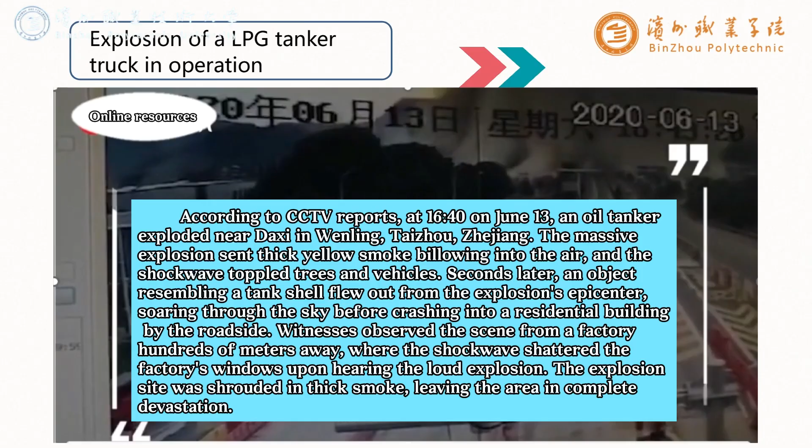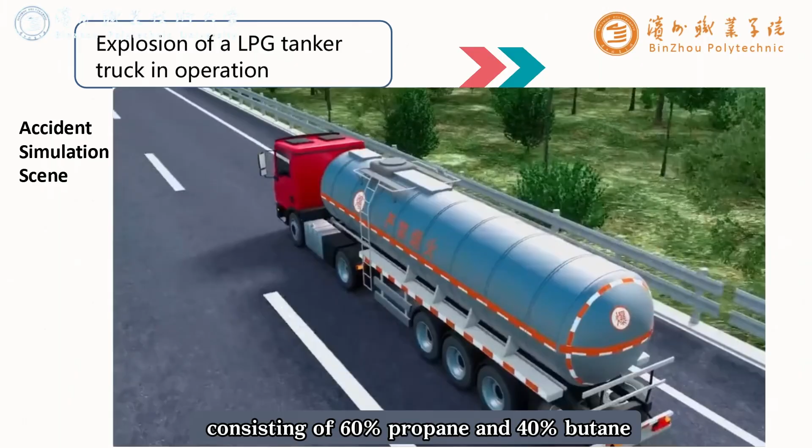This is a simulation of the accident. At around 16:40 on the 13th of June, 2020, a Dongfeng brand semi-trailer tanker, loaded with approximately 25 tons of liquefied petroleum gas, LPG consisting of 60% propane and 40% butane, and with a filling pressure of 1200 kPa, approximately 12 atmospheres, was traveling on a section of the Shenhai Expressway near Wenling, Taizhou City, Zhejiang Province.

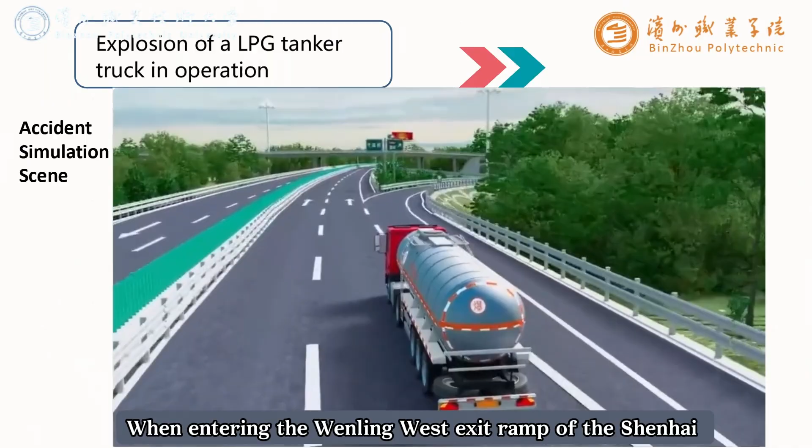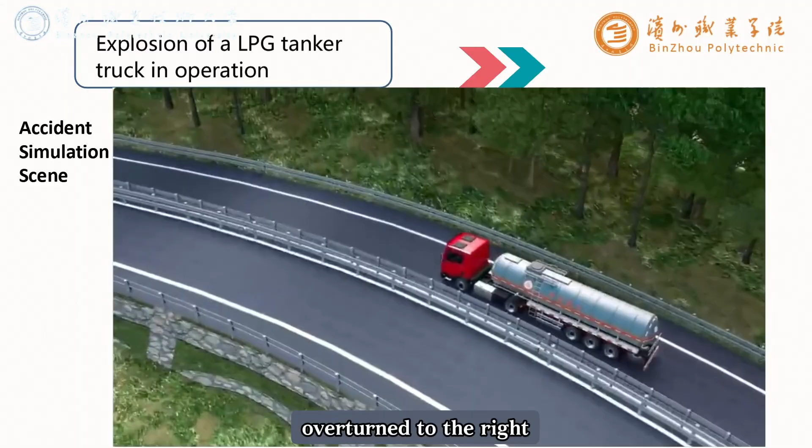When entering the Wenling West exit ramp of the Shenhai Expressway heading towards Wenzhou, the vehicle did not slow down according to the road speed limit of 30 km per h. It entered the ramp at an actual speed of 52 to 54 km per h, overturned to the right, scraped against the rotating guardrail of the ramp, and slid forward.

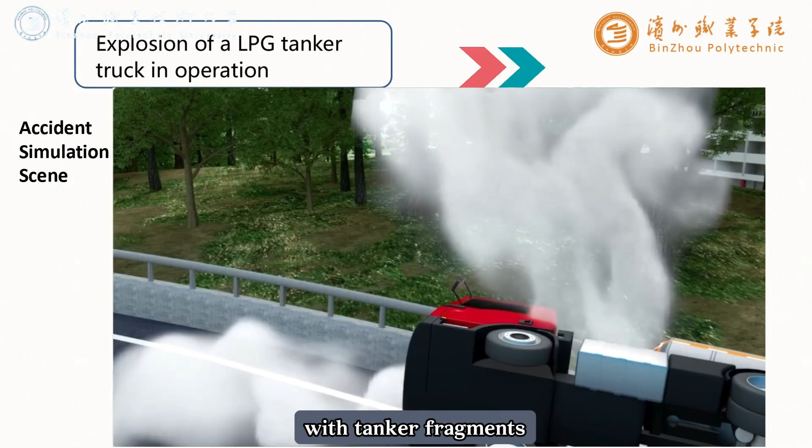The tanker collided with the concrete guardrail end of the overpass bridge on the ramp, causing the tanker to rupture and disintegrate. The tractor and semi-trailer separated, with tanker fragments and the semi-trailer flying out in different directions. The LPG in the tanker quickly leaked, vaporized, diffused, and spread.

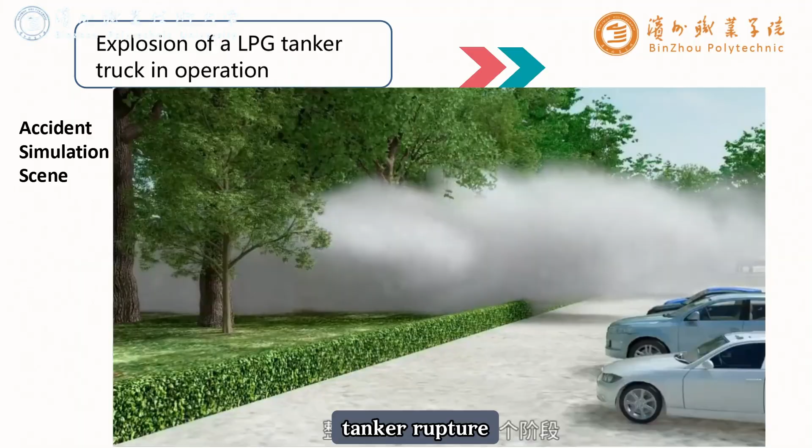The entire accident process was divided into 4 stages: tanker rupture, LPG leakage and diffusion, initial deflagration, and secondary vapor cloud explosion. The accident investigation concluded that the explosion of this liquefied petroleum gas (LPG) tanker truck, carrying approximately 25 tons of cargo, caused massive damage.

Ultimately, the accident resulted in 20 deaths, 175 hospitalizations, and direct economic losses of 94.77815 million yuan. This was the most severe in-service LPG tanker truck explosion in nearly 20 years. This incident was a major industrial safety accident caused by a LPG tanker truck traveling at excessive speed on a highway ramp, resulting in a rollover, collision, and leakage, which subsequently triggered an explosion.

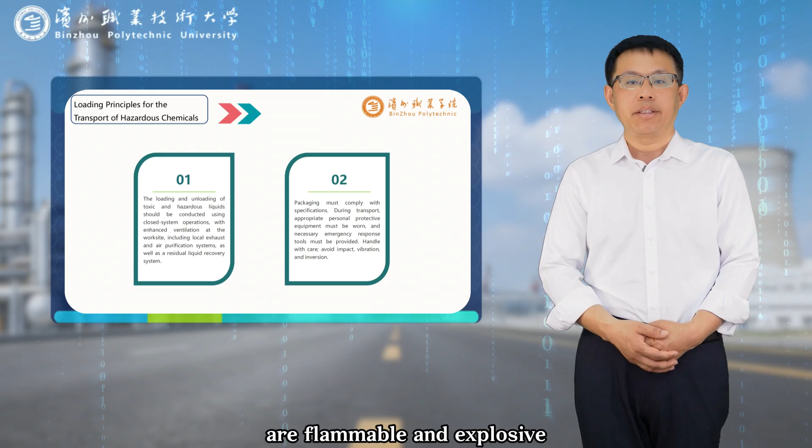China is a major producer and user of hazardous chemicals, which are typically transported by rail, water, and road using trains, ships, and trucks. Since most of the transported substances are flammable and explosive, and transportation is often affected by factors such as climate, terrain, and the environment, safety requirements for such transport are generally high. So, what precautions should be taken when transporting hazardous chemicals?

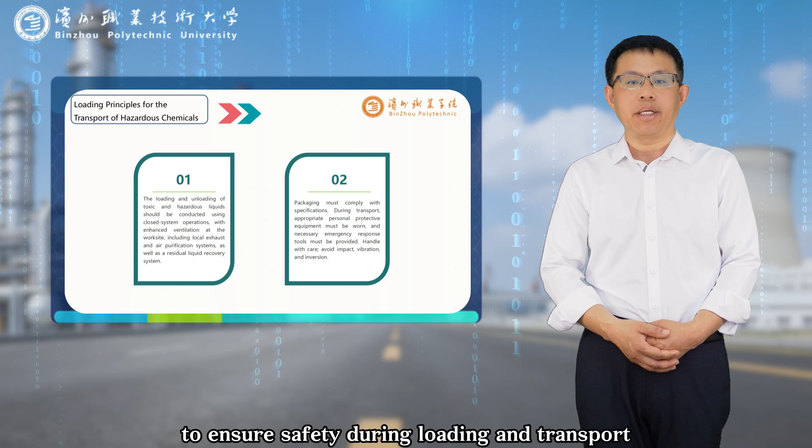First, let's examine the loading principles for hazardous chemical transportation. Since the hazards of hazardous chemicals vary, items with conflicting properties can often cause combustion or explosions when they come into contact, and the fire extinguishing agents and methods used in the event of a fire are not entirely the same. Therefore, to ensure safety during loading and transport, relevant loading principles must be followed.

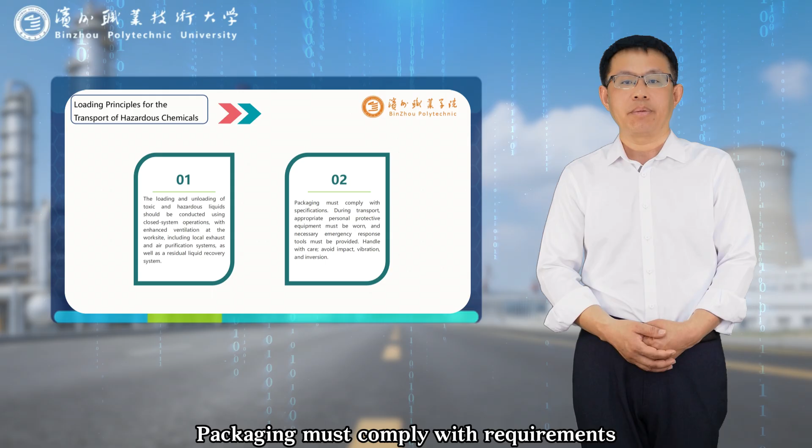The loading and unloading of toxic and hazardous liquids should employ closed system operations, and ventilation at the worksite should be enhanced by installing local ventilation and purification systems, as well as residual liquid recovery systems. Packaging must comply with requirements, and during transport, appropriate personal protective equipment must be worn and necessary emergency response tools provided. When handling, materials must be loaded and unloaded gently. Impacts, vibrations, and inversion are strictly prohibited.

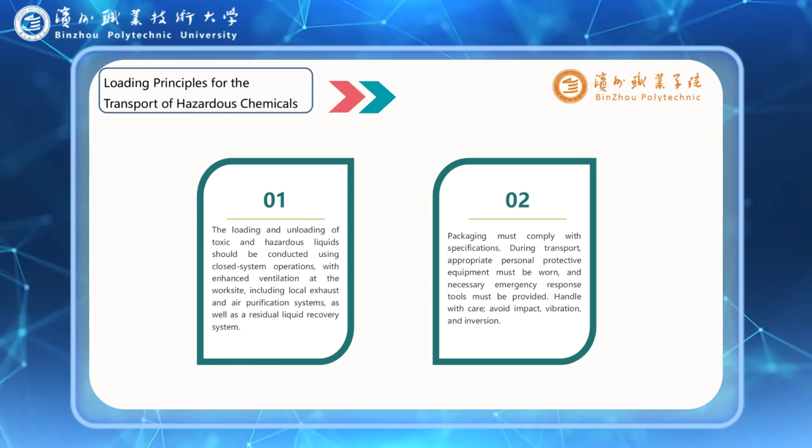Safety precautions for road transport of hazardous chemicals. When transporting hazardous chemicals by road, vehicles must display signs indicating the transport of dangerous goods. While driving or parked, maintain a safe distance from other vehicles, high-voltage power lines, densely populated areas, tall buildings, and key cultural heritage protection zones.

Follow routes and schedules designated by local public security authorities. Overtaking, speeding, and overloading are strictly prohibited to prevent friction and impact. Vehicles must be equipped with appropriate safety protection facilities.

Safety precautions for the rail transport of hazardous chemicals. Railways are the primary means of transporting chemical raw materials and products. Tank cars are typically used for flammable and combustible liquids, while specialized hazardous materials freight cars are used for other dangerous goods.

Platforms used for loading and unloading flammable and combustible liquids and other hazardous materials must be constructed of non-combustible materials. Safety ladders must be installed every 60 meters along the platform to facilitate personnel evacuation and firefighting. Electrical equipment on the loading platform must be explosion-proof, and fire extinguishing equipment and fire water supply facilities must be provided.

Steam locomotives should not enter the loading platform. If entry is unavoidable, a spark arrestor must be installed on the smokestack. When stopping, wooden blocks should be used instead of the brakes to prevent sparks. A buffer car must be placed between the locomotive and the tank car.

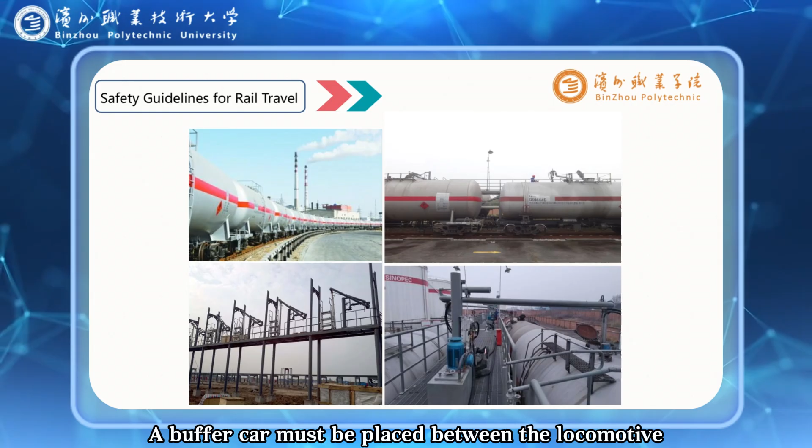Emergency shutoff valves should be installed on pipelines used for loading flammable liquids. Tank cars must not leak oil. The flow rate of loading and unloading hoses should not be too high, and connecting hoses should be properly grounded to prevent the generation of static sparks.

Loading and unloading operations should be suspended during thunderstorms. Open flames or ordinary flashlights must not be used for nighttime inspections. Safety precautions for the waterway transport of hazardous chemicals. When vessels are carrying flammable or explosive goods, they must display dangerous goods markings. The use of open flames on board is strictly prohibited.

Coal-fired tugboats must be equipped with spark arrestors, and the safety distance between the stern of the tugboat and the bow of the barge must not be less than 50 meters. Motor vessels transporting flammable liquids with a flash point below 28 degrees Celsius must be approved by local inspection authorities.

Wooden vessels are prohibited from transporting bulk flammable liquids, highly toxic substances, radioactive materials, or other hazardous substances. The transport of highly toxic substances is strictly prohibited in enclosed waters.

When loading or unloading flammable liquids, the shoreside oil transfer line must be securely connected to the vessel's oil transfer line, and the vessel's hull must be connected to the metal body of the oil pump vessel or oil pumping station using a conductor with a diameter of no less than 2.5 millimeters. During oil transfer operations, the conductor must be connected first, followed by the transfer line.

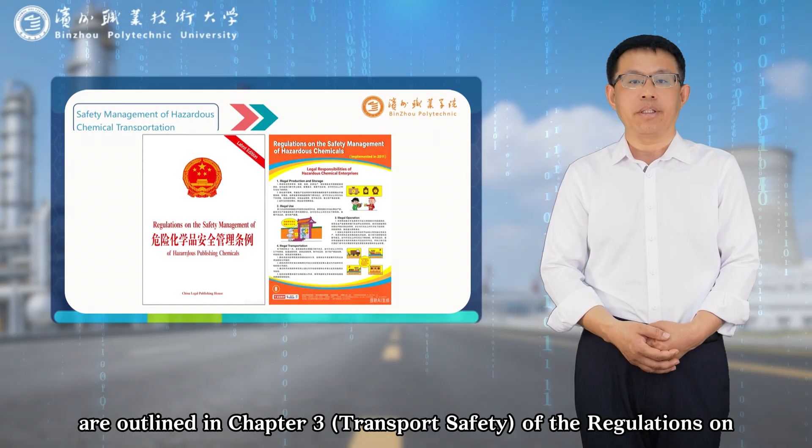Regulations regarding the safe transport of hazardous chemicals are outlined in Chapter 3, Transport Safety, of the Regulations on the Safety Management of Hazardous Chemicals, State Council Order No. 591. In this lesson, we studied the safety of hazardous chemical transportation, learned about the principles of loading and stowage for hazardous chemical transport, and reviewed safety precautions for transportation by road, rail, and water. We also learned about the packaging and labeling of hazardous chemicals.

That concludes this session. For your reflection after class, please consider the following question. What are the requirements for the safe transport of hazardous chemicals?